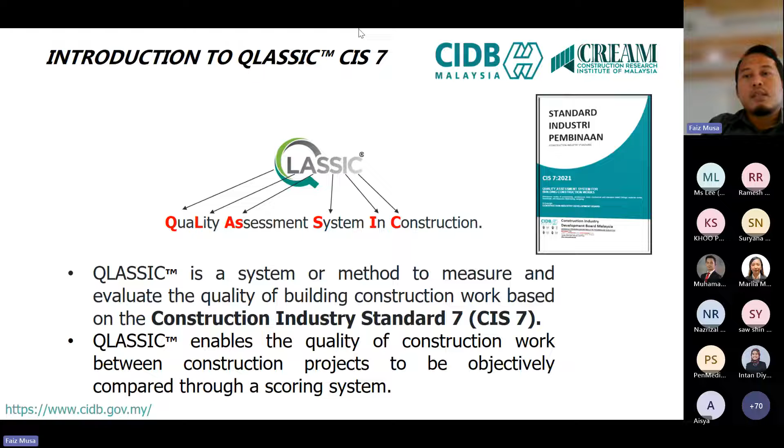So basically, QLASSIC enables the quality of construction works between construction projects to be objectively compared through a scoring system. So for your information, QLASSIC is already registered. We have trademarked it, whereby only CIDB can use the logo, and there's a TM trademark. Okay, so we have registered with IP. Only CIDB is allowed to use the term QLASSIC and its logo.

Okay, so what are the objectives of QLASSIC? There are four main objectives. First is to benchmark the level of quality in the construction sector, whereby if we use QLASSIC referring to CIS 7 to assess a project, for example project A and project B, the scoring can be used as a benchmark. For example, project A got 80 and project B got 75. So that's how we use QLASSIC to benchmark the level of quality. And then second, to identify the contractor's performance.

Basically, the client will use it when, for example, they have one project and divide it into two phases. So maybe the first phase is contractor A and the second phase is contractor B. So they can use QLASSIC to identify the quality of each contractor's performance, carrying out the QLASSIC assessment divided in two. And then third, to ensure that construction industry players are always consistent in providing quality work. So nowadays the big guns, developers like Sunway and Sunrise, are competing against each other for the highest score.

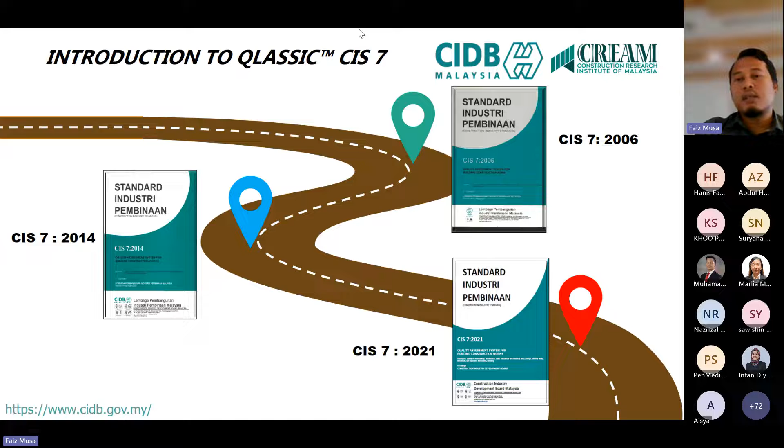So who is involved in the development of CIS 7? Basically, CIS 7 is not developed only by CIDB. We invite industry players to give some input. For example, we invite JKR, JPN, Jabatan Perumahan Negara, KPKT, REHDA, Master Builders, HBA, CABE, PAM, ACEM, and we also have CREAM and IIUM, which were involved in the development of CIS 7 for 2021. So it's not a standard solely developed by CIDB. We carry out workshops to get input from the industry.

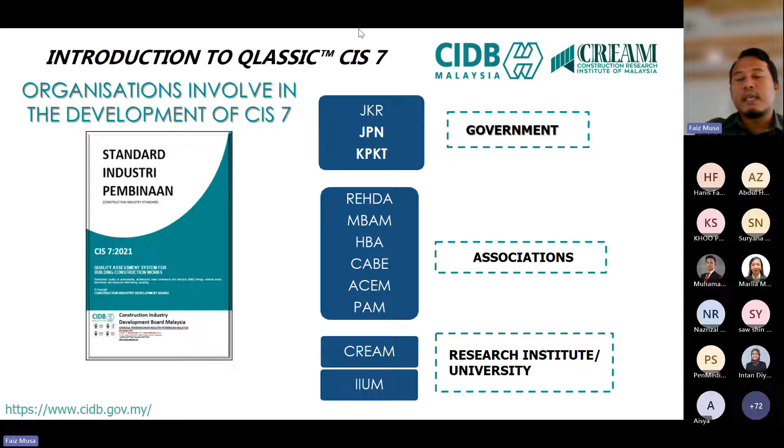So what are the government policies related to QLASSIC? For your information, the 12th Malaysia Plan, RMK 12, has highlighted that QLASSIC assessment is to be made compulsory in order to deliver affordable housing. In RMK 12, the government is supposed to deliver 500,000 affordable housing units. So QLASSIC will be used as an assessment system to ensure the quality of this affordable housing. That's RMK 12.

Next is the Dasar Perumahan Negara, DPN 2018 to 2025. QLASSIC certification is also made compulsory for public and private housing projects, but there's no indication of a score set. They just make it compulsory to carry out QLASSIC assessment for public and private housing projects. The next policy, 2018-2028, also highlighted that QLASSIC certification is to be carried out for all affordable housing projects.

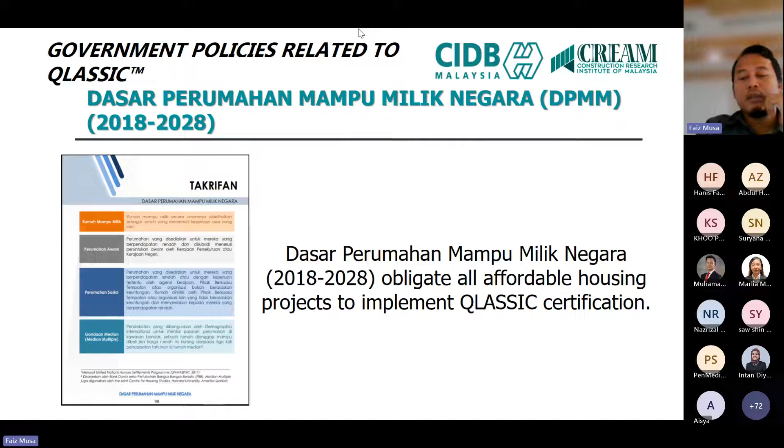Lastly is the National Construction Policy 2030, NCP. Inside there are thrusts. QLASSIC is highlighted in thrust 1, which is strengthening quality and safety in construction projects, whereby at A1.4 QLASSIC is to be recognized as an assessment system to be used for quality assessment. So those are the current policies related to QLASSIC, to increase its adoption.

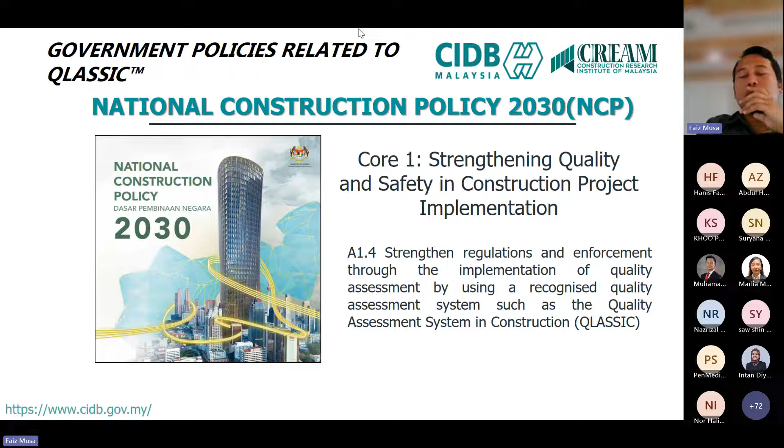These are the average QLASSIC assessment scores from 2016 until 2022. Basically, the private sector's score is higher compared to the government sector. Usually in practice, the private sector will indicate the score inside the contract, for example, a score of 75 that the contractor needs to achieve. That's why for the private sector, the score is slightly higher compared to the government sector.

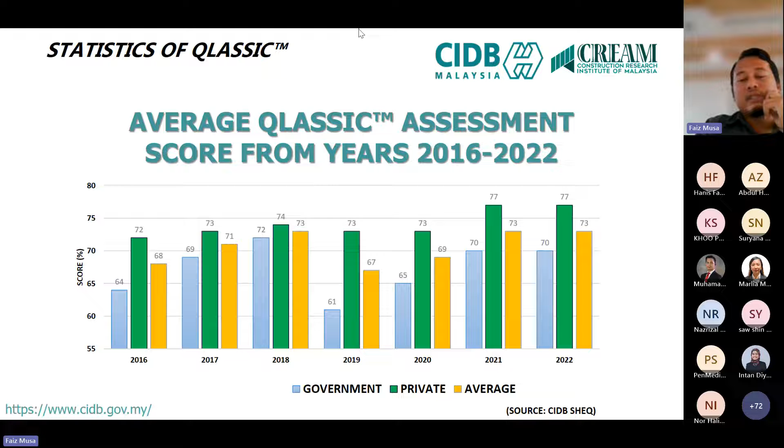So the average for government projects in 2016 is around 64, then 69, 72, and then in 2019 it went down to 61, then increased back to 65, 70. The private sector is roughly around 70 and above since 2016. So the average score for private and government is still above 68, but weighted more to the private side, higher compared to the government.

These are the highest QLASSIC scores by state and number of assessments for the year 2022. As you can see, most states carry out QLASSIC assessment, but the numbers differ. The most projects assessed for QLASSIC is in Selangor, roughly around 70 projects last year, and the lowest is in Kelantan, which is only one.

For the highest score last year, they have been recognized at our event, where we award or recognize the high achievers for QLASSIC. For 2022, the highest QLASSIC score is in Johor, Sangwi or Kalasari if I'm not mistaken, with a score of roughly 90.

These are the scores by state. As you can see, the scores are almost all 65 and above.

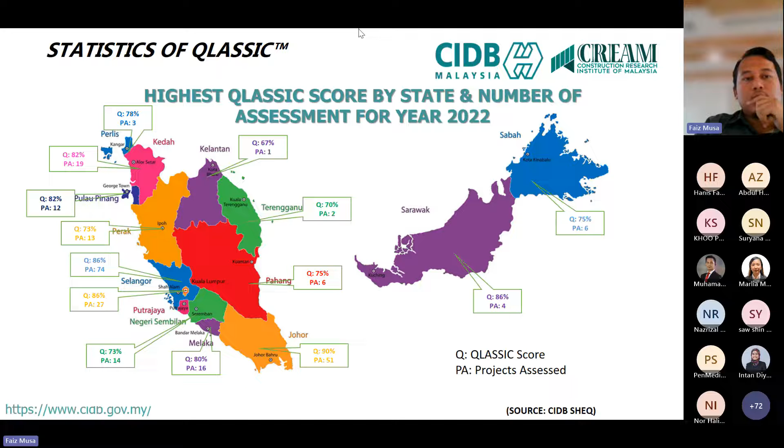This is the average QLASSIC score by building category for the year 2022. For QLASSIC we have categories, but I will not explain in detail because the next presenter will be explaining about it. So we have category A, which is landed, B high rise, C public building without centralized aircon, and D is public building with centralized aircon.

So for last year, 248 projects have been assessed. Category A, mostly landed projects, had the highest number of projects assessed, for landed residential. For example, terrace housing, bungalow, semi-D, double-story terrace house, single-story terrace house. Those are the projects being assessed for category A. The highest score for category A is 90, which is in Johor. The lowest is 58, and the average for category A is 77.06.

For category B, which is high rise, 59 projects have been assessed, which include apartments and condos. The highest score is around 88, the lowest score is 55, and the average score is roughly around 76. For category C, public building without air condition, total assessments carried out is around 42. The highest score is 83, lowest is 65, and the average is around

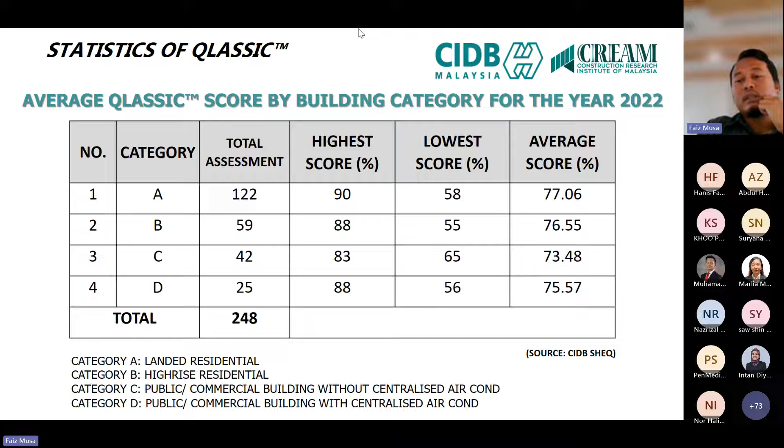These are the adoption among our industry players. For example, the clients that adopt QLASSIC in their projects are Sime Darby Properties, IJM Land, Sunway, Sunrise, Skyworld. Those are the private ones, a few that I listed. For the government, it's basically JKR, PKNS, and Prima.

This is how Prima implements QLASSIC. QLASSIC is not only carried out during the architectural works; it should start during the structure works. The implementation covers the overall process of the project. For example, if inside the contract you did not indicate the requirement to fulfill CIS7 as the standard and QLASSIC, and then in the middle of the progress the client would like to include QLASSIC, first it will increase the cost a bit, and then the process will be slightly changed.

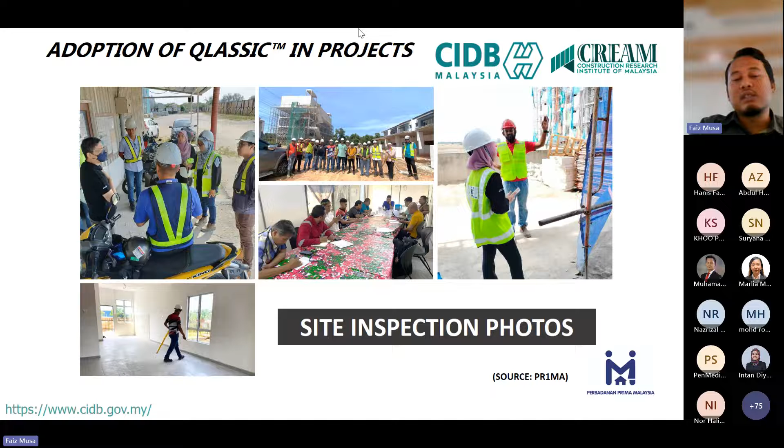For Prima, it started off during the briefing stage, where they indicate the score this project needs to achieve, and then throughout the phases the Prima team will come and work together with the contractor to achieve a higher score. They start during the structure works. As you can see from the picture, during the structure works they ensure everything is in line. For example, if your column alignment is not aligned, surely it will affect your architectural works, your brick works or your plastering works.

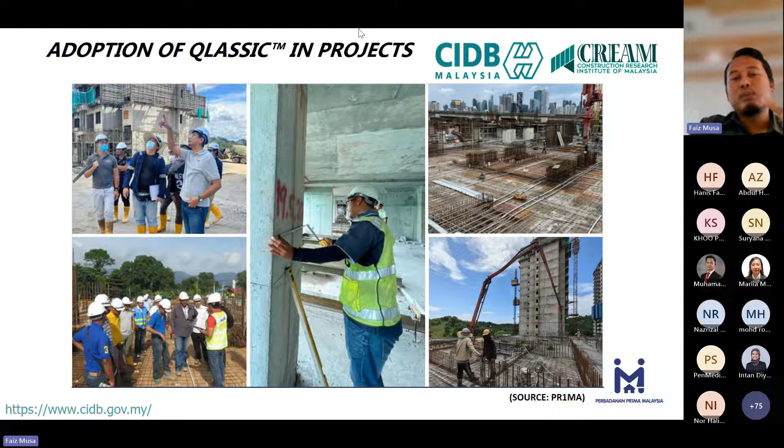That's why during the structure works, the Prima team has their own programs. They carry out the QLASSIC process during the structure process. As you can see, they monitor during the structure phase. And once the structure has been completed, they also start to monitor during the architectural works. As you can see, checking hollowness, everything.

That's how they ensure there's no damage to the material, because basically material cost nowadays is quite pricey, high. So that's why they try to ensure the quality of the materials is in good condition before installation. Okay.

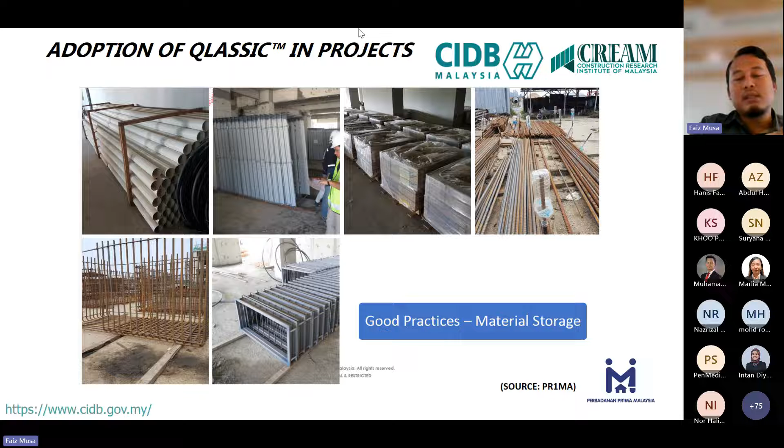Next, I will go to QLASSIC awareness, QLASSIC training. So far in CIDB, we have 2 related QLASSIC trainings. First is the QLASSIC awareness course, which is carried out physically or online. The duration is basically 1 day. The aim of the course is to enable participants to acquire the knowledge on CIS7.

It's open to the government sector or the private sector, and you can go to training at CIDB Holding, or you can just Google CIDB Holding. You can register the class in their system, just register online, then you can go to the course. Okay, so first is QLASSIC awareness.

For those who are interested to become a CIDB QLASSIC assessor, first they need to go to the QLASSIC assessor course, which is physical only. It's a 3-day course comprised of 3 modules. First module is theory, second module is practical, 1 day, and then module 3 is examination.

Previously, we made QLASSIC awareness compulsory. If you were to become a QLASSIC assessor, you needed to attend the QLASSIC awareness course first. But we changed the process a bit. You just need to attend the QLASSIC assessor course and make sure that you pass. Module 3 is basically an examination, there's only fail or pass. Those who pass can go to the next stage. I will explain later.

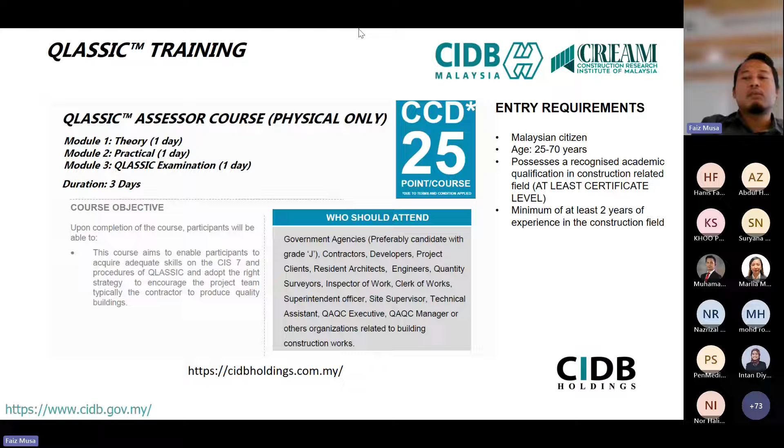So what are the entry requirements? Basically, Malaysian citizen, age 25 to 70 years. Possess a recognized academic qualification in a construction related field, at least certificate level, meaning like sijil pembinaan, not a certificate of attendance. The level of the cert is certificate level at least. And lastly, a minimum of 2 years experience in the construction field.

Then I will be explaining how. If you are interested to become a QLASSIC assessor, this is the flow. Basically you need to apply first for the QLASSIC assessor course by CIDB Holding. Only the QLASSIC awareness and assessor trainings are carried out by CIDB Holding, but they have trainers under them. So make sure the training is by CIDB Holding.

So first you need to apply for the course through CIDB Holding, and make sure your application is complete. If complete, you can go to the next stage. If it's tidak lengkap, you need to go back. Once your application is complete and you make payment, you can attend the QLASSIC assessor course, CIS7.

Next, module 1 is basically theory, 1 day. The trainer will explain how to identify compliance or non-compliance based on CIS7. Then the second day is practical, meaning they will provide a show house where, for example at a wall surface, you need to identify any non-compliance to CIS7. So that one is the practical, day 2.

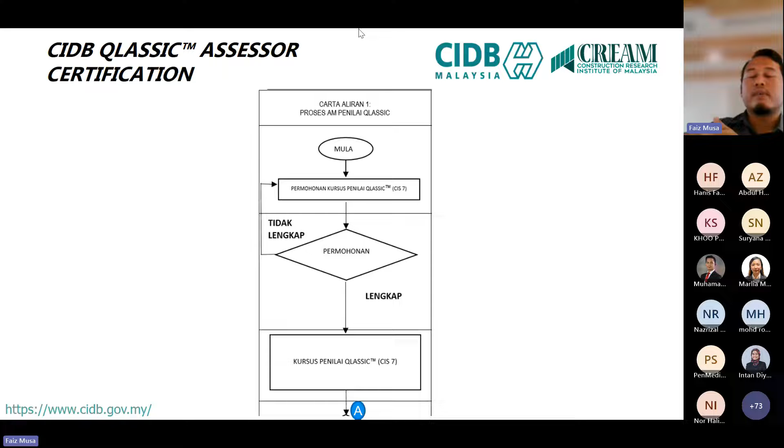If you fail, you can just go back. Just pay again. It's either you go back attending the same course, or you just repeat the examination only. That's the option. But if you feel that you need to go again, you need to pay the full cost. But if you feel confident just to go for the examination, just pay the examination fee, and then make sure you pass.

Once you pass, you can go for the permohonan penilaian QLASSIC to CIDB. You need to fill in a form and submit your proof of passing the examination, the letter from CIDB Holding, and the slip of attendance for day 1 and day 2, module 1 and module 2. Once you have completed your submission, CIDB will process. If everything complies, we will submit your application to our certification center. We call it PP, which is now CREAM.

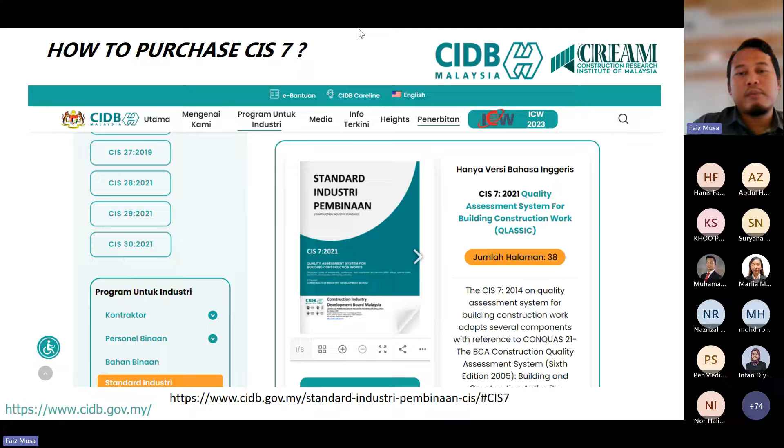The way forward for QLASSIC: we at CIDB are currently trying to make QLASSIC compulsory for government and private building projects. We are approaching KKR and KPKT to make QLASSIC compulsory. But the mechanism has not yet been finalized, so insyaAllah in the future.

And then the second way forward is the enhancement of the QLASSIC CIS7 assessment method, whereby we'll adopt new technology inside our assessment, not only QLASSIC tools. We have, for example, laser devices and drones to assist the assessor to carry out the QLASSIC assessment.

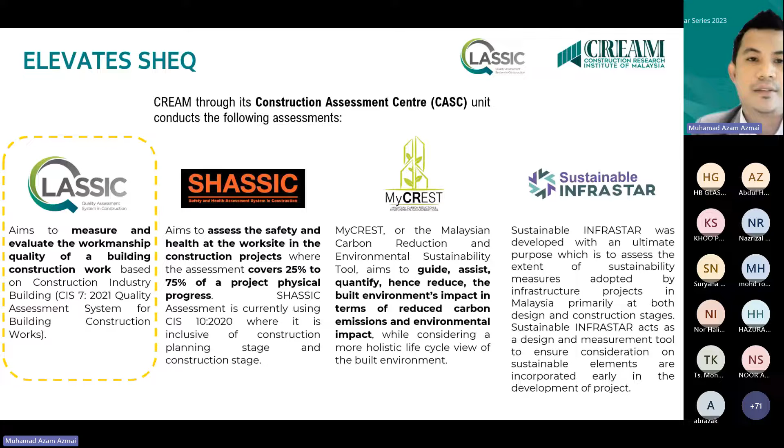For the introduction of QLASSIC, I will not say more because it's already covered by our previous presenter. What I can highlight here is that QLASSIC mainly focuses on measuring and evaluating the workmanship quality of building construction. This is the main element and purpose of CIS7. QLASSIC enables the quality of workmanship in a project to be objectively measured through a scoring system, as a percentage. If a project scores higher, for example 90%, that 90% covers all the main areas in CIS7.

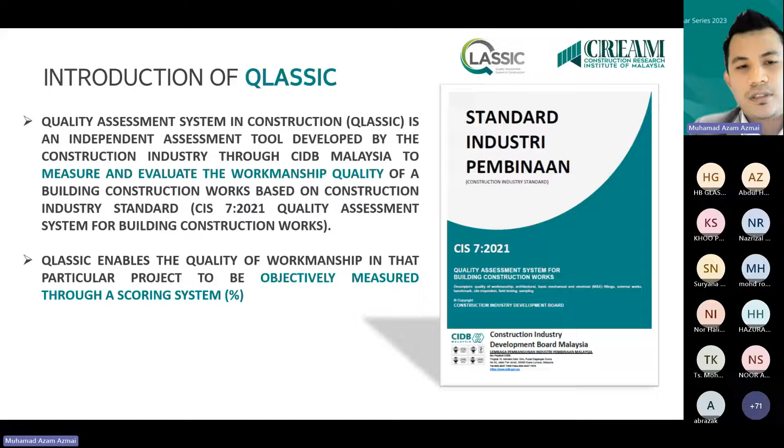So okay. Next is QLASSIC building category. In QLASSIC, we separate into 2 categories, residential and non-residential. Residential is separated into 2 categories, category A and category B. Category A is for landed housing; examples of the housing are detached, semi-detached, terrace and cluster house. Category B is stratified housing. Examples of the project are flat, apartment, condominium, service apartment, SOHO, and townhouse.

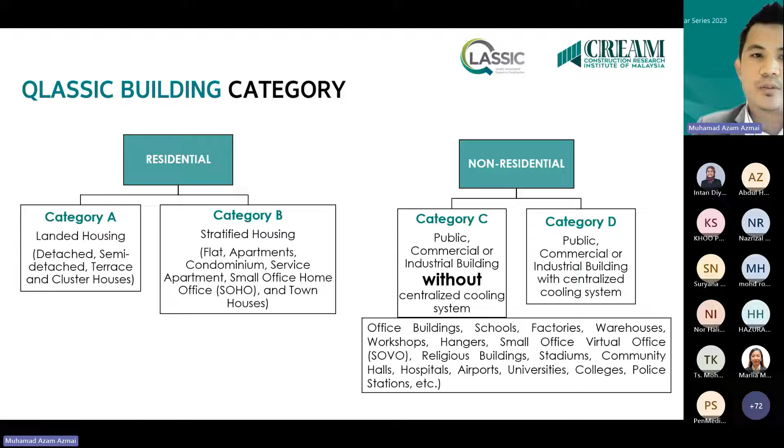Okay, nowadays there are projects that have mixed development in particular buildings. For example, nowadays high-rise building projects have a mall in the project. So it's categorized as a mixed development project. The respective project and development should be categorized according to the building category. For example, the applicant comes to us and says they only want to do QLASSIC on the residential buildings. So even though the mixed development project covers residential and non-residential, the application will only focus on the residential project based on the client's request.

Here, I will go to QLASSIC weightage. This is the weightage that has been set up by the standard. As you can see in table 1, this is the allocation of weightage for components of building construction work according to building category. The three main components in QLASSIC are architectural works, basic M&E fittings, and external works. This is the weightage that has been categorized in the CIS 7.

Okay. For category A and B, the weightage of architectural works is higher than non-residential because most of the assessment in architectural works will cover the units of the project itself. As you can see, residential buildings are where the person will live. So the architectural work is basically the unit, the house itself. So the assessment will focus more on the quality of the architectural works. Basic M&E fittings are very basic fittings like switches and so on. For external works, the weightage is lower than non-residential.

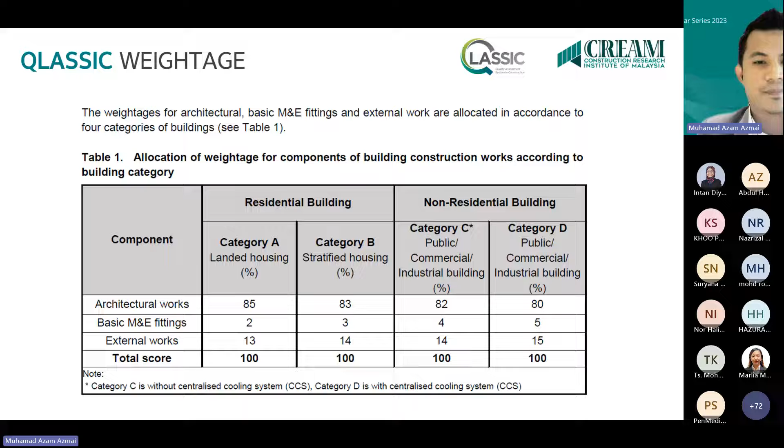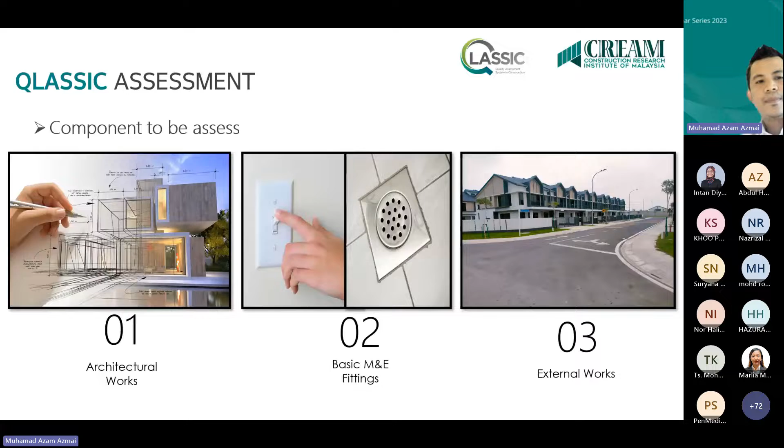Okay. So these are the components to be assessed in QLASSIC, as I mentioned before: architectural works, basic M&E, and also external works. So what is architectural works? Architectural works deal mainly with finishes. This is where the quality and standard of workmanship are most visible. These are the elements in architectural works: roof, window, door, internal fixtures, ceiling, perimeter drain and apron, internal wall, floor, and lastly external wall and fixtures. The elements, defects and checking parts will be covered by our next presenter. Architectural works are where the assessor will mostly do the assessment in a particular project. I will not go into detail on this.

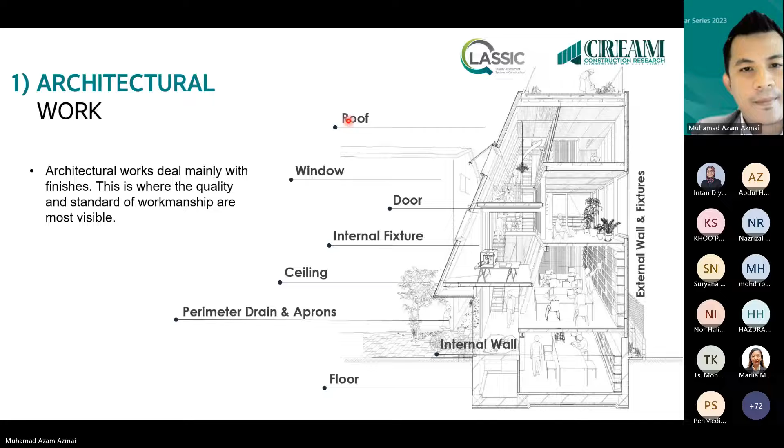This is the QLASSIC weightage for architectural elements. These are the elements that will mostly be covered in the assessment. We have separated them into 3 categories: internal finishes, external finishes, and material and functional tests. This is the breakdown and weightage. For internal finishes, we cover floor, wall, ceiling, door, window, and internal fixtures. These breakdowns are already mentioned in the CIS 7. For external finishes, we cover roof, external wall, apron and perimeter drain, car park and car porch. And lastly, material and functional tests: we cover skim coat or pre-packed plaster and wet area water tightness.

Okay, for material and functional tests, the assessor doesn't have to do the assessment on site. Why is that? Because these two inspections need to be done by the client, and they need to prove it to us by sending over the architect letter that mentions this project has covered both inspections. They just need to declare it in the architect form and submit it to us, to CREAM. If we receive the evidence, we will automatically give the score. This is 6% out of 100% for architectural elements. Okay.

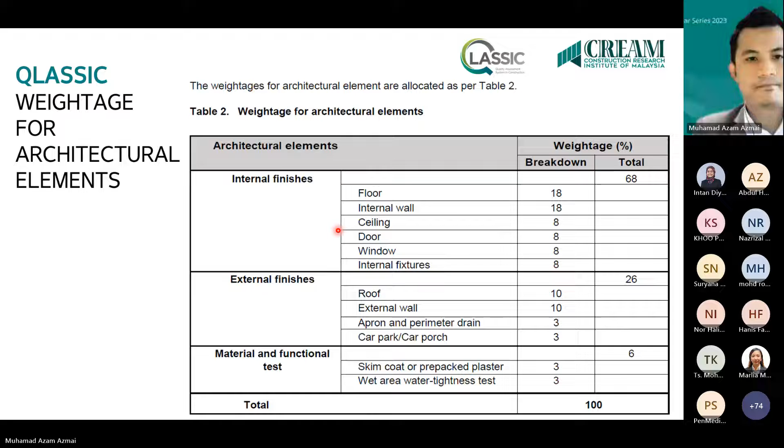This is the QLASSIC sampling guideline. I saw the questions in the chat box, so hopefully I can answer your question. In QLASSIC, we do the sampling based on the GFA of the project. It's not practical to do the assessment in every unit or house in a particular project.

For example, nowadays in high-rise residential, the number of units is increasing, and most projects right now are focused on high-rise buildings in category B. Based on our records, the number of units is increasing, starting from maybe 2,000 units to 3,000 units.

So it's really impossible for CREAM and the assessors to do the assessment in all of the units. It would take a month or 2 months to finish the project. So QLASSIC realized the issue, and they introduced the sampling guideline here.

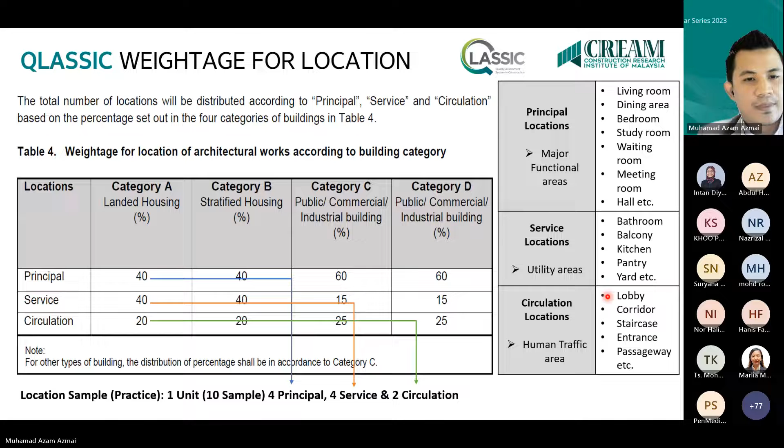Okay. Number 2, I will cover basic M&E fittings, mechanical and electrical. The quality of M&E works is important in view of its increasingly high cost proportion and its impact on the maintenance of a building. The assessment only covers basic fittings, covering plumbing and M&E fittings. For plumbing, the assessor will assess the quality of the finished work.

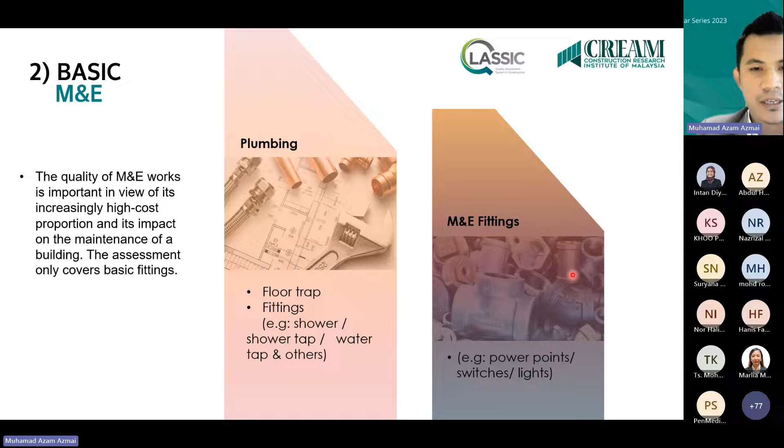For floor trap, for fittings we cover shower tap, water, and other elements that have been installed in the location. For M&E fittings, we cover power points, switches and lights. We will cover only the finishing part for these elements. The weightage for basic M&E fittings is here. For categories A, B, C, and D, the percentage and the weightage are different. Okay.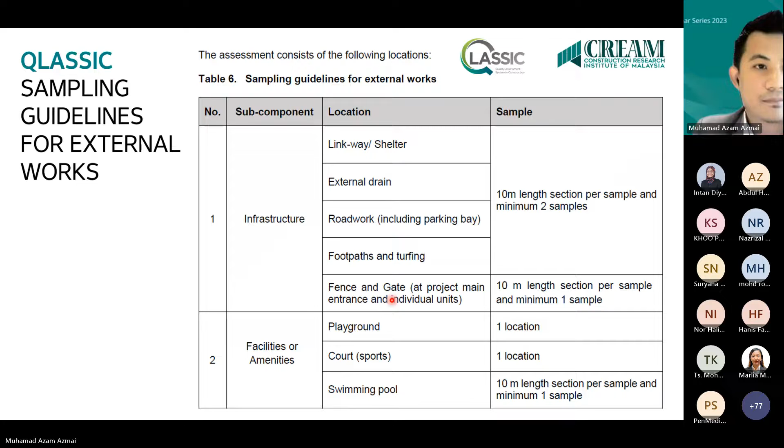So what is the evidence? In our process, the main document evidence that we need from the client is the surat vacant possession, or vacant possession letter. So what is the importance of this letter? Because we want to know when the project will be handed over to the client. We don't want to do the assessment past the date of the VP, because we don't want to do the assessment when the client is already inside the building. Maybe the quality will be affected.

And next is the surat perakuan arkitek. Okay, here the surat perakuan arkitek, or we call it a declaration letter.

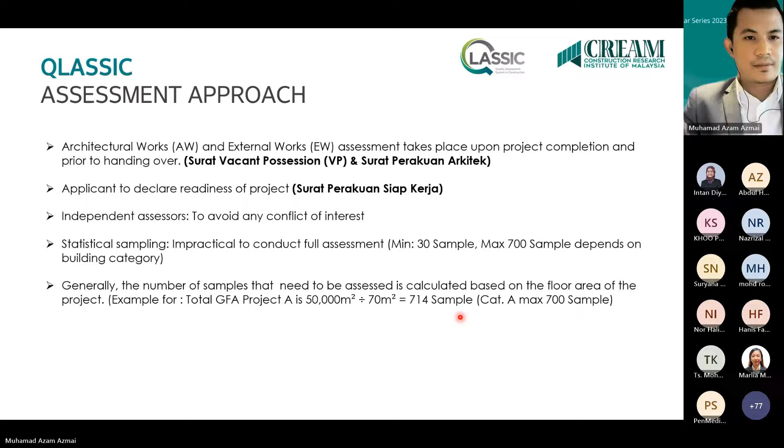Number 2 is sampling. The number of samples to be assessed is based on the total GFA and the sampling guideline in CIS 7. Number 3 is notification of assessment: after the sampling, we notify the assessor. The assessor is an independent and certified CIDB assessor who carries out the assessment.

Number 4 is site project assessment. When the assessors are notified, they come to the project and do the assessment at the project site. Normally in a QLASSIC assessment, the duration is from 1 to 4 days. And lastly, when the project has been assessed, CREAM will issue the assessment report and certification.

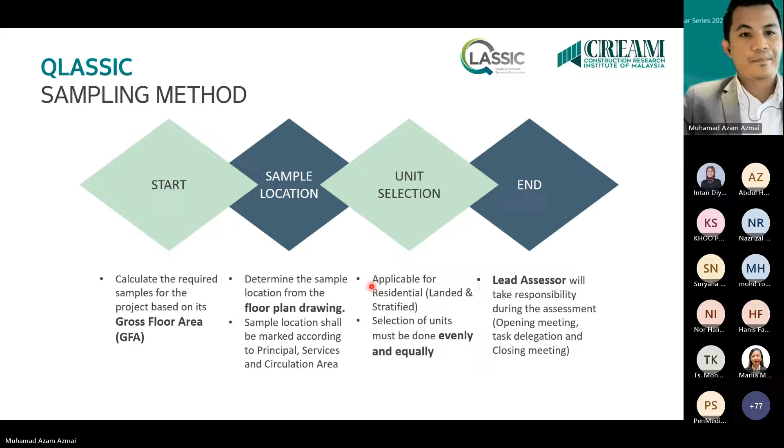Okay, as I mentioned before, the client needs to look at the surat architect. They already declare some elements that need to be excluded, or some of the design that does not meet the criteria in the CIS 7. So we need to discuss first before the assessor does the assessment. Lastly is to inform sample and unit selection and to ensure all samples or units selected are available for the assessment. This is very important.

That's why it is very important the assessor comes before the VP takes place. We want to avoid the units that we have selected not being assessable due to the arrival of the home buyer. Okay.

Next is assign job. Lead assessor to divide and distribute samples and units equally to members. For QLASSIC, the total number of team members depends on the number of samples and days of assessment. Normally in our practice, for assessment of 1 or 2 days, we will cover with 2 assessors. For the maximum sample for category A and B, it will be divided into 2 teams, so the total number of assessors required is four.

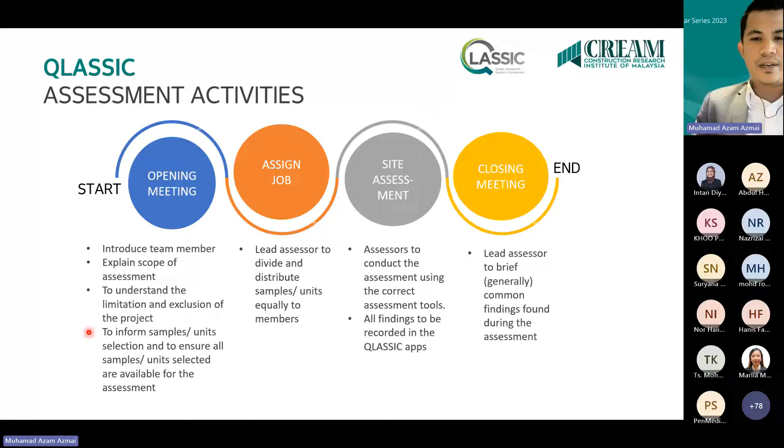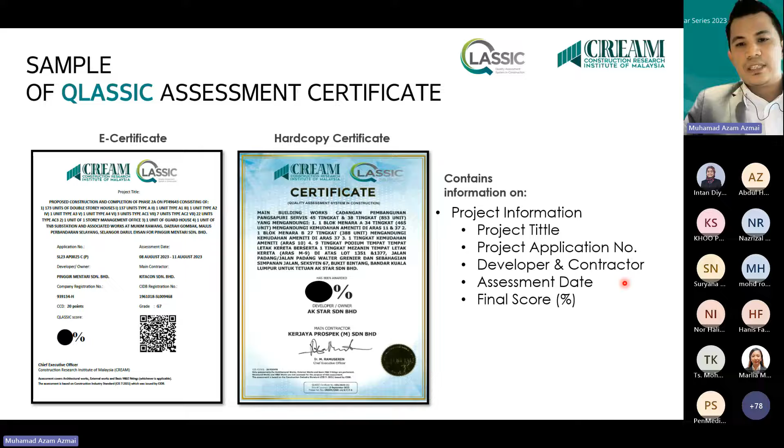So that's all for my presentation. So, as a QLASSIC slogan, here is doing things right the first time and every time. So good luck to every one of you and enjoy the webinar series.

Can share. Yes, yes, we can see your slide. Ada keluar? Can you stop sharing first? Now you're sharing your screen. Okay, can you share your PowerPoint? Okay, yes. Share window. Okay.

Assalamualaikum, good morning and salam sejahtera. My name is Muhammad Helmyyuzi. On CREAM Webinar Series 2023, I will present my part: assessor guidance, best practice tips and common assessment findings. Okay, we go through the first slide.

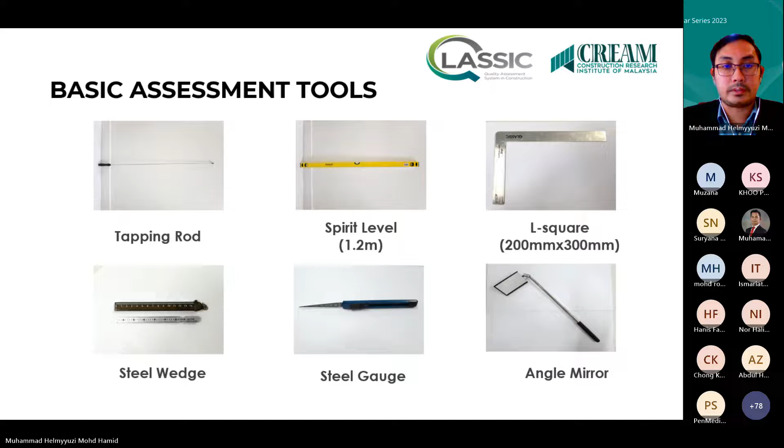This is our basic assessment tools that we use when doing a QLASSIC assessment on site. The first one is the tapping rod. Second one, spirit level 1.2 meter. The third one, L square, 200 millimeter times 300 millimeter. Then steel wedge and steel gauge, angle mirror. So these 6 items are the basic tools that we use during a QLASSIC assessment activity. Okay, we go through one by one.

First, the tapping rod, that we use for checking hollowness on floor and wall. Usually we use it on the floor surface, and also skirting, only tile skirting. For the method, swipe the floor and wall surface. When we swipe, firstly you hold the tapping rod, and then if you hear a sound different from other tiles, maybe not a solid sound, you can stop and tap to make sure whether it is a hollow sound or not. It's the same with the wall surface.

For tile skirting, you can use the tapping rod, swipe or tapping. Usually we tap; tapping is more convenient for tile skirting. Also, the tapping rod is not suitable for timber flooring and timber skirting. The other use of the tapping rod is to detect any lippage on tiles. Usually you swipe every floor, and if you feel your ball bearing bounce from the floor, then you can use a steel wedge and L square to confirm whether there is any lippage between two tiles on that floor.

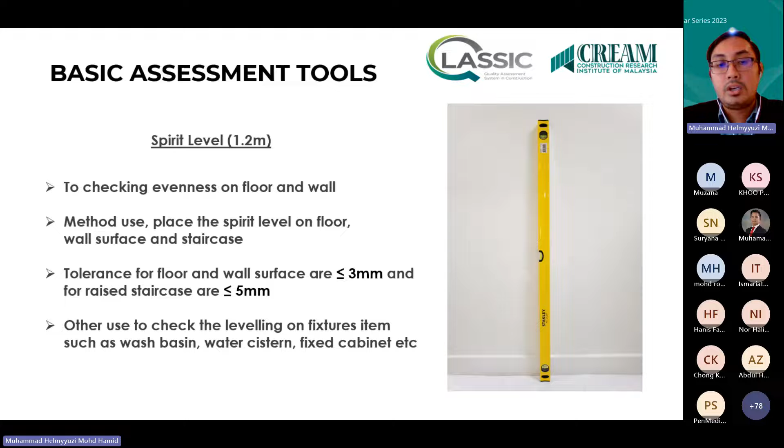Okay, the next one is L square. We use L square 200 mm times 300 mm. Usually this one is for checking the wall is made at right angle, usually at the corner, inner and outside. Method used: place the L square on wall corner, and lippage between two tiles. Okay, the method for lippage between two tiles, I will show you on the next slide. Okay.

Okay, for L square, if you see any gap or a non-consistent wall area, I mean wall corner, you can put the L square on the wall corner and use the steel wedge to measure the angle, to measure the gap for L square. Okay, for the corner, actually I didn't put it on the slide. In this corner it must not be more than 4 mm.

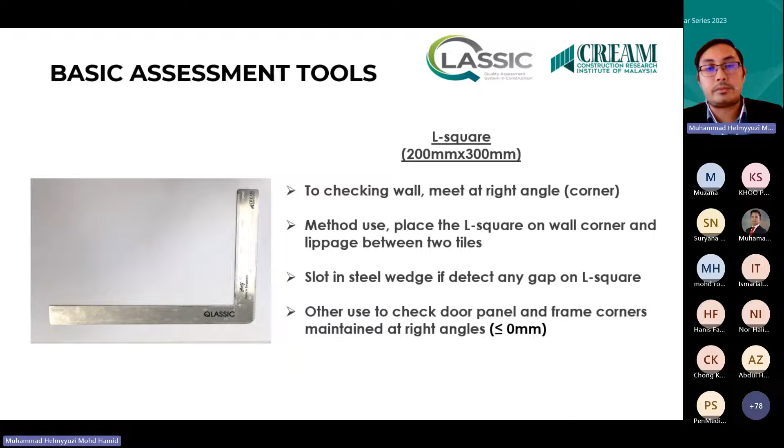Okay, the other use for the L square: you can use it to check the door panel and frame corner to maintain a right angle. You can see this picture. You can see our QLASSIC assessor used the L square to make sure to get the right angle. The tolerance is 0 mm. To make sure the frame or the door frame has no sagging, it must be straight and perfect.

Okay, these three are our small items that we use. First, we go through one by one. Steel wedge. The steel wedge is to measure floor and wall alignment and evenness. As I mentioned just now, the steel wedge is usually paired with the spirit level to check the evenness, usually on the wall surface, to make sure not more than 3 mm. Also it's paired with the L square to check alignment and lippage: alignment at the corner and lippage between two tiles at the floor.

Okay, this is the steel gauge, also called steel rule. Sometimes other assessors call this one steel rule; steel gauge and steel rule are the same. It is used to measure consistent gap on top and bottom of the door panel. We can slot it in and check every gap from top and bottom. Make sure not more than 5 mm tolerance. Also to measure between door panel and frame, we can slot it in top, down, and also right and left, to see door panel and frame not more than 5 mm.

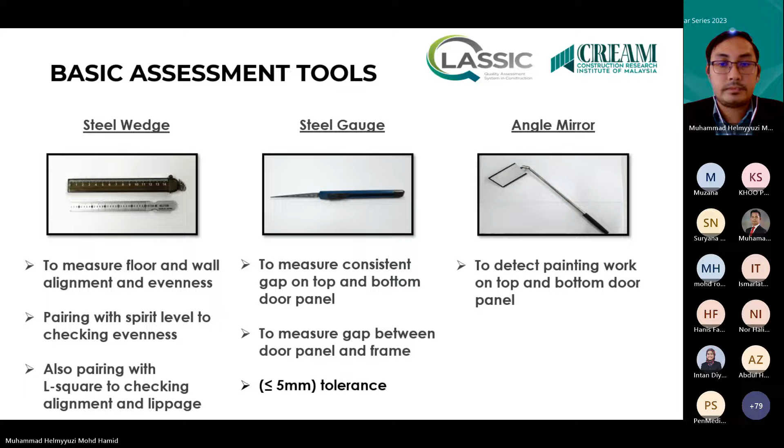Okay, the next slide. This is our QLASSIC assessment form for internal finishes. You can see right here, you just state the project, block, and unit. The assessor usually uses this form when doing a QLASSIC assessment. They must fill up all these blanks: project, block A, block B, anything, and unit number. And the project ID is usually stated in the surat pemakluman. Usually when the assessor gets the job from CREAM, they get a surat pemakluman, and it states the project ID.

Also the date of assessment. Usually we use two assessors, assessor 1 and assessor 2. Okay, these are the items and elements we check: floor, wall, ceiling, door, window, fixtures, and basic fittings. Okay, here I just fill the item and location. You can see it's living. For that I just circle living on P. It's called principal. P for principal, S for services, and C for circulation.

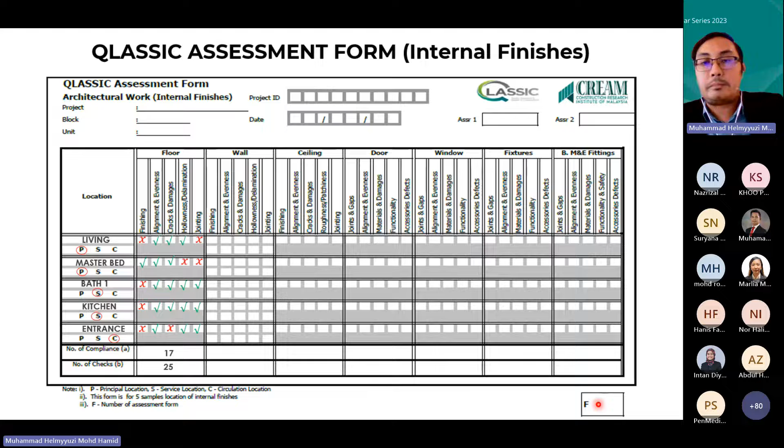If the item is not NA, not applicable, you can calculate all of this. So 17 over 25. Also, the assessor, do not forget to fill the form. We call it F for form. These are form 1. Okay, we go through the next slide.

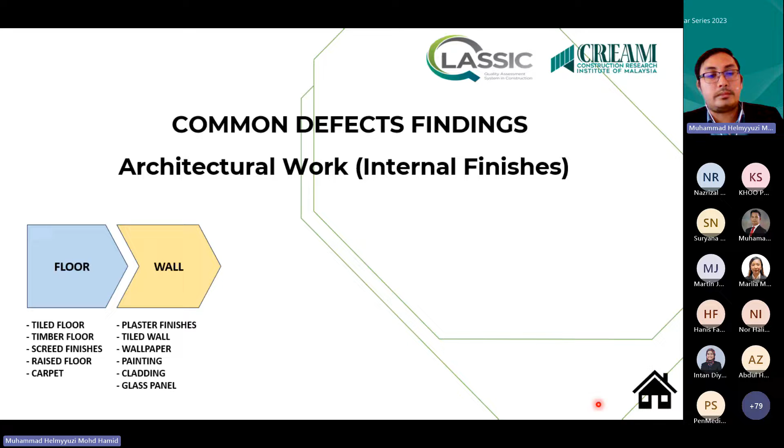Common defect findings for architectural work, internal finishes. Okay, for floor, in the industry now there are so many floors that we can see. I just state here: tile floor, timber floor, screed finishing, cement screed, raised floor, carpet. And also we check wall: plaster finishing, tile wall, wallpaper, painting, cladding wall, glass panel, etc. Also ceiling: plaster ceiling, false ceiling.

And then door: solid panel door, sliding door or pocket door, flush door. Also window: louver, top hung, casement window. And the fixtures: water cistern, wash basin, railing, kitchen cabinet, wardrobe. And the last one, basic fittings: switches, power point, and floor trap. This is 6 plus 1, 7 elements that we check for internal finishes.

Okay, this is a picture of defects for floor. You can see the first picture. Maybe you just saw a paint stain. In the QLASSIC form, the QLASSIC assessor can see maybe 2 defects: tile finishes with paint stain, and also at the jointing you can see paint stain there. The next picture, the second one, is the grouting. You can see there's a gap on the grouting for the tile. And the third is a lippage between 2 tiles.

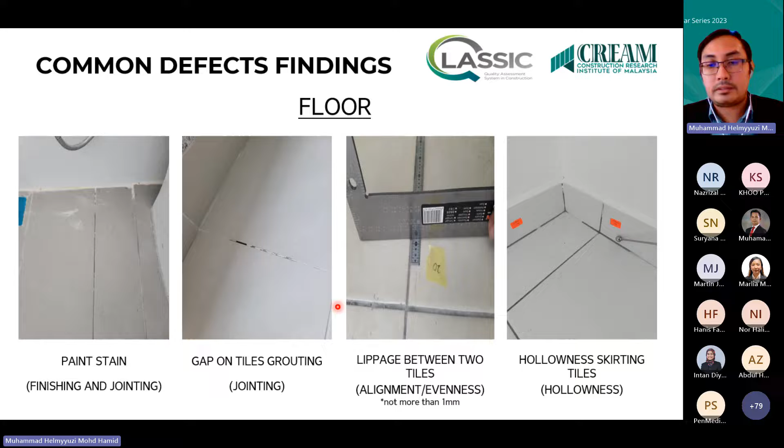And then the second, we can cross at the jointing. And the third, we cross the alignment and evenness, not more than 1 mm. If it's more, we just cross. And hollowness, the last picture is hollowness. Okay, there is another picture for floor, on timber floor. We cross at the finishing, chipped damaged tile. We cross in the form at crack and damages.

And the third, we can see timber flooring, gap and damaged timber flooring. We cross crack and damage. Also, you can see there is a gap on the timber. Also, we cross the jointing. So there are two defects in this one picture.

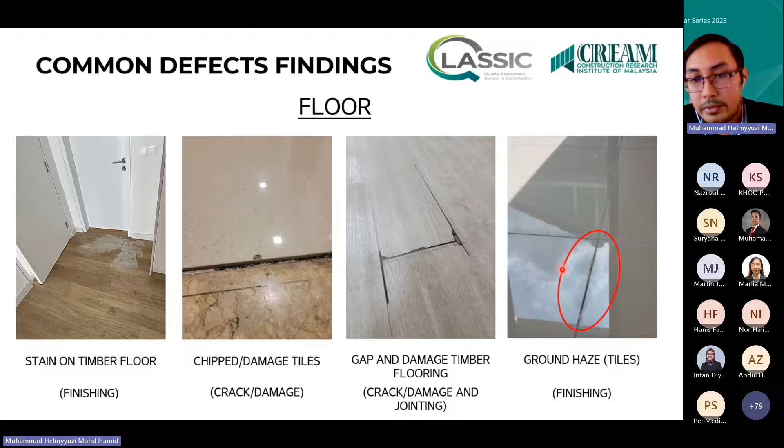Okay, the last one, usually I see it at some sites. I just saw there's a ground haze stain. Ground haze stain usually appears maybe from moisture, I think from the jointing of the cement screed, and then it just spreads into the floor tile, so it becomes like this, becomes a defect. So we cross at the finishing defect.

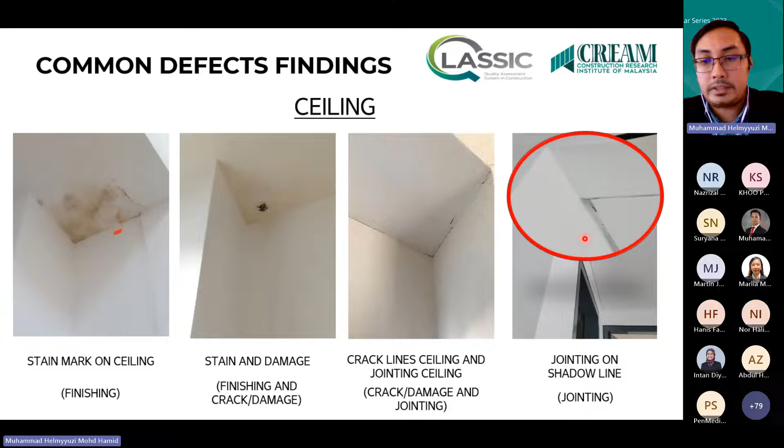Okay, the next slide is for door repair mark finishing. If there is any damage on the door, sometimes there is damage on the panel door and the workers do not repair it with the, what we call, the white filler. They do not repair it back. They just paint back. They just repaint the door panel. As assessors, when we see this, we just cross the finishing because this is not a perfect job. That's not a nice view.

Okay, the next one is no painting work on top of the door panel. Material, we cross at the material and damages. Usually, if there is no other defect on the door panel, you can use the inspection mirror to look at the top of the door panel to see if there is any painting work or not.

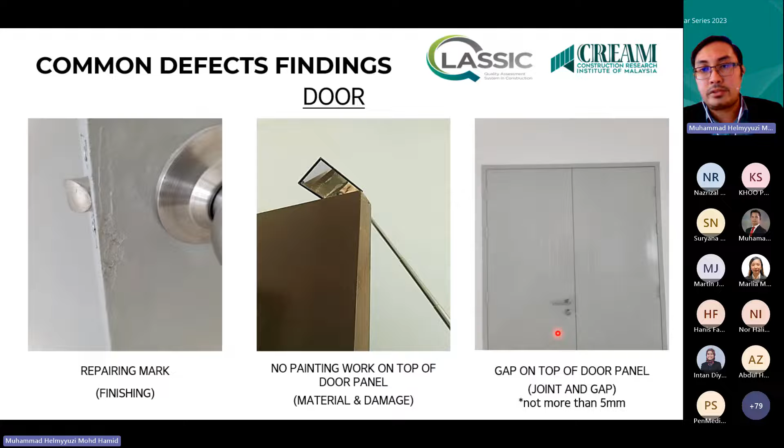Okay, the last one is gap on top of door panel, joint and gap. You can see this picture. When we look from far, we can see there is a perfect gap around the door panel. But if you want to make sure, when you see just a little gap, you must use the steel wedge to measure the gap on the top of the door panel. As you can see, there is more than 5 mm. So there's a defect for joint and gap.

Okay, the next picture, paint stain, paint drop on the accessory, because of the accessories defect. And the next picture, rusty mark on door handle, also an accessories defect. Okay, the last picture, rattling sound when closed. This is because of alignment and evenness. When we close the door, you can hear if there is any rattling sound. This rattling sound is one of the defects.

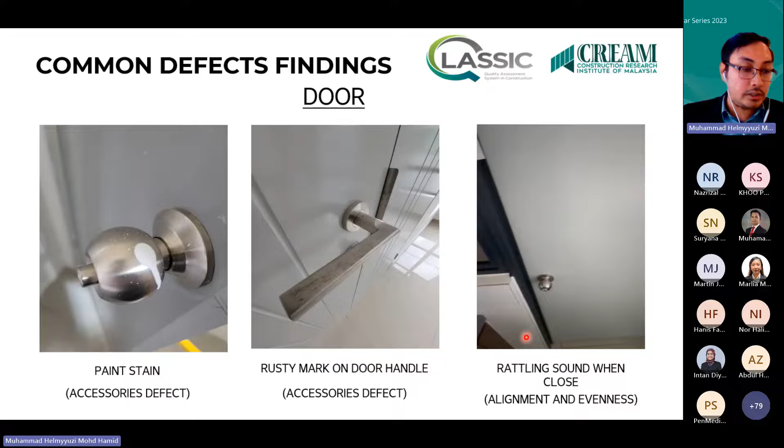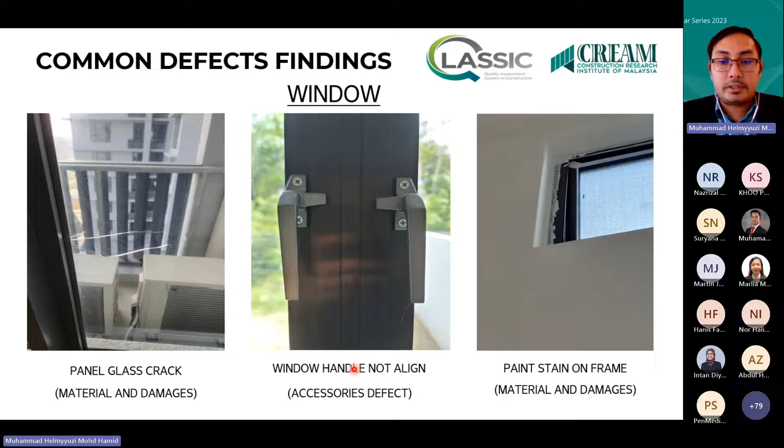Okay, the next one, window. As you can see, panel glass crack because of material and damages. Window handle not aligned, because of accessories defect, you can see these two window handles are not aligned. And a paint stain on frame because of material and damages. And the next, fixtures and fittings: concrete stain, material and damages; broken flush button, we cross accessories defect; and gap between basin and tabletop, joint and gap.

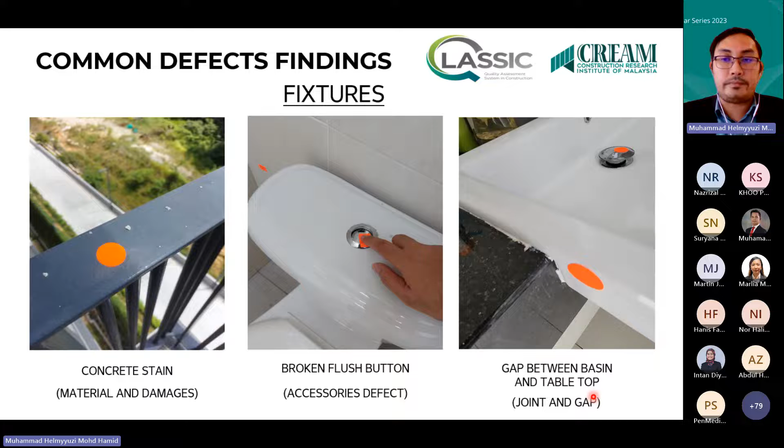Okay, the next pipe, not aligned, we cross at alignment and evenness. Sometimes, like this, the assessor needs to check every wet area has a floor trap. If they find a half moon like this, there is a defect for alignment and evenness. The next one, switches not aligned, alignment and evenness. You can see the switches are not at the same level.

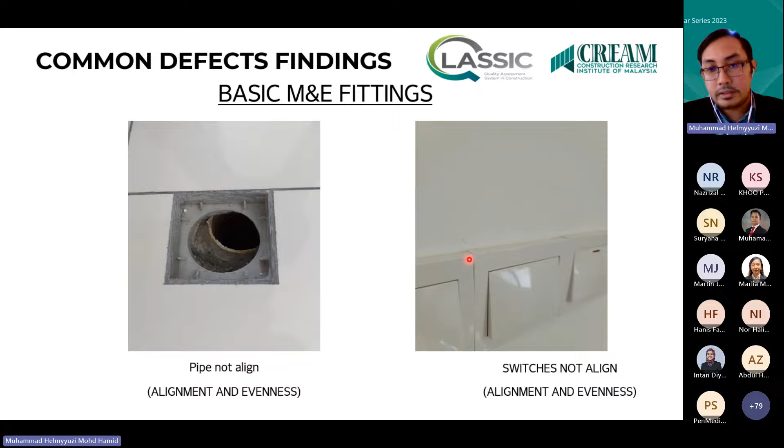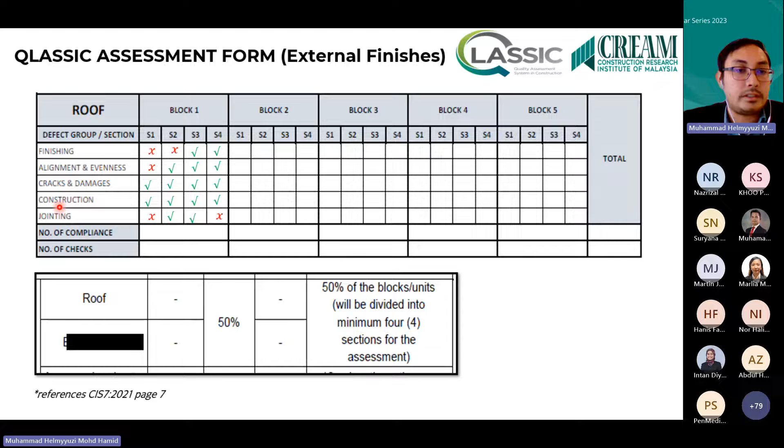Okay, we go through the next form. The next form is for external finishes. For the roof, I just make an example. Finishing for sample one. Right now, I make an example for one block only. One block: finishing, alignment, evenness is the same. We just change to construction. Finishing, alignment and evenness, crack and damages, construction, jointing. And after the assessor has assessed the roof, they must calculate the number of compliances and number of checks. So 15/20.

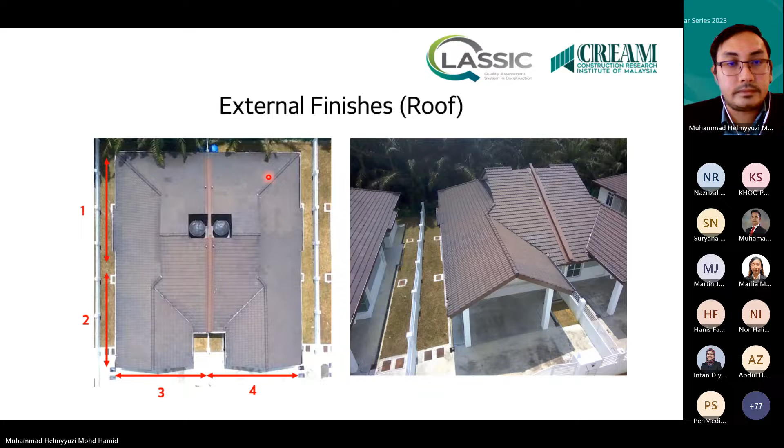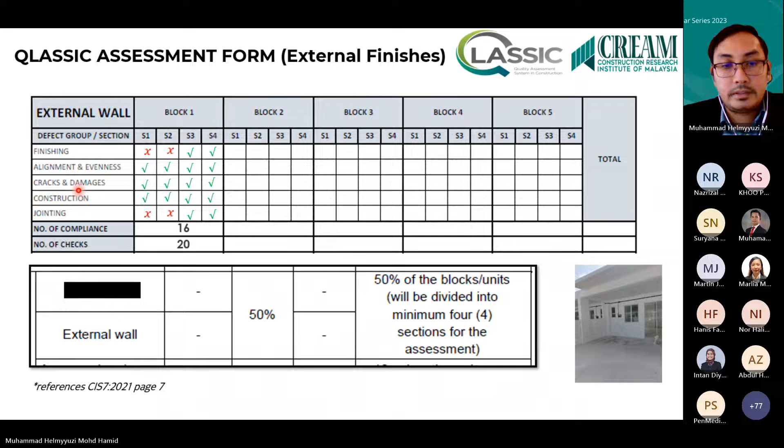Okay, this is for external wall. The assessor can divide like this: sample 1, sample 2, sample 3, and sample 4. This example is for a terrace housing. If one block has 10 units or more than 50 units like this,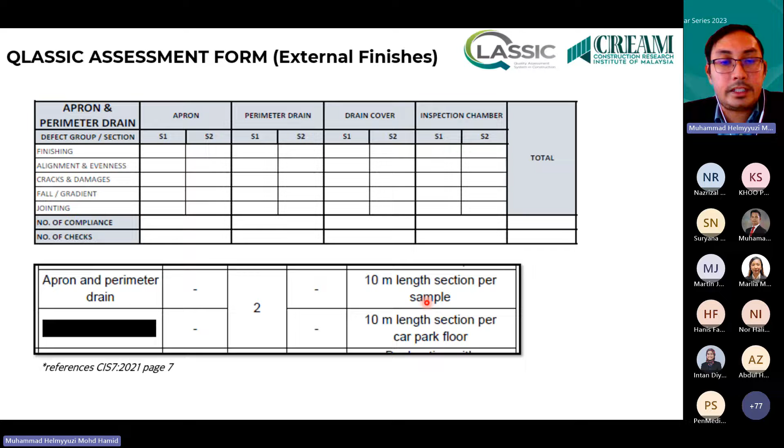You can see 10 meter length section per sample. So 10 meter for one sample, and then another 10 meter, 2 samples. You can take a sample like this one for 10 meter, and the second sample, you can take another house or any area. And you can see the right picture is drain and concealed drain.

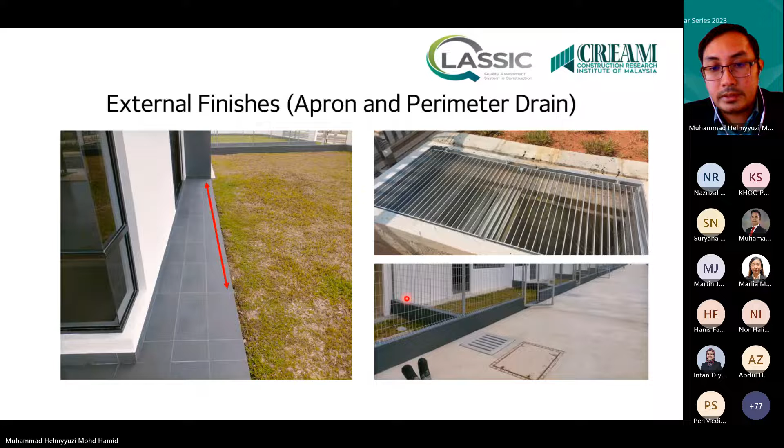Okay, the next is car park and car porch. Usually car park and car porch will cover floor, column, wall, ceiling, features, basic M&E fitting. Also minimum 2 samples, 10 meter length section per sample. Okay, this is an example of car park and car porch. You can take the floor, column or wall, the ceiling, and basic M&E fitting. Maybe the picture is too far. If you can see, there's basic M&E fitting there, switches.

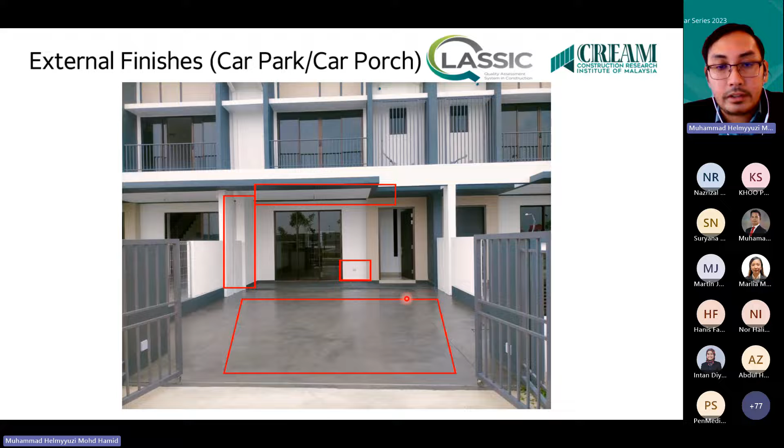There's a power point right there. And in this picture, there are no features. Features may be a wardrobe or anything attached to the building, attached to the wall.

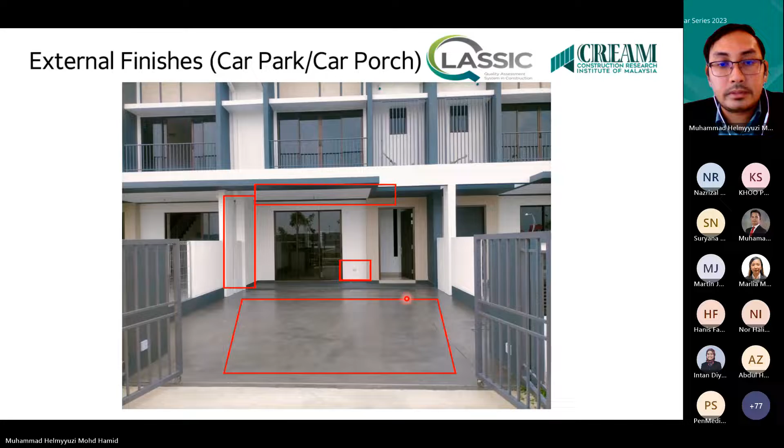Okay, next we check road work. For road work, we check road surface, road marking, road curb, road sign, and road lighting. Also footpath and turfing, lighting features. Also these two items, 10 meter length section per sample and minimum 2 samples. Minimum, you can take more. Reference CIS 7 2021 page 9.

You can take footpath turfing. You see a perfect turfing like this. And the second picture, road work. As you can see, road work has road surface, here road marking, road curb, road lighting, and road sign. So if the assessor takes all the elements like this, it's better.

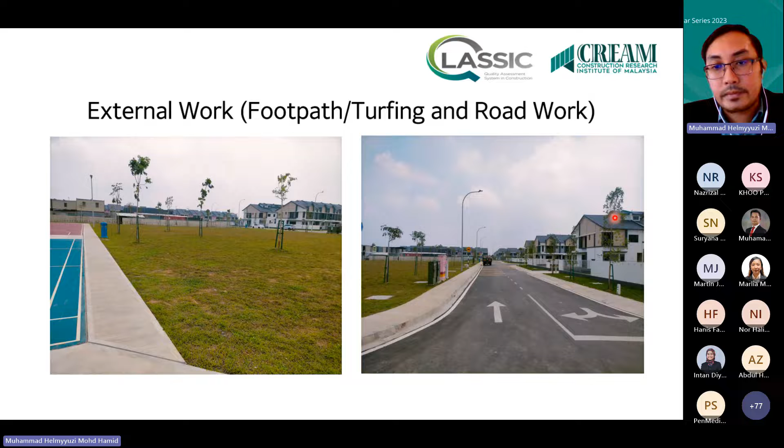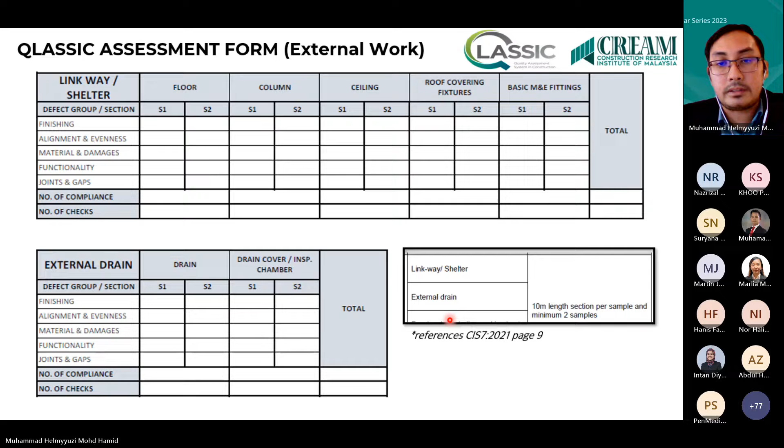Okay, next, linkway shelter. For linkway shelter, floor, column, ceiling, roof covering fixtures, basic M&E fitting, and also external drain, cover, inspection chamber. Also 10 meter length section per sample and minimum 2 samples. You can see we take a sample for shelter and external drain.

For external drain, by the new CIS 7 2021, if there is any water ponding inside the external drain, the water not flowing, the drain does not flow, we consider it a defect in alignment and evenness.

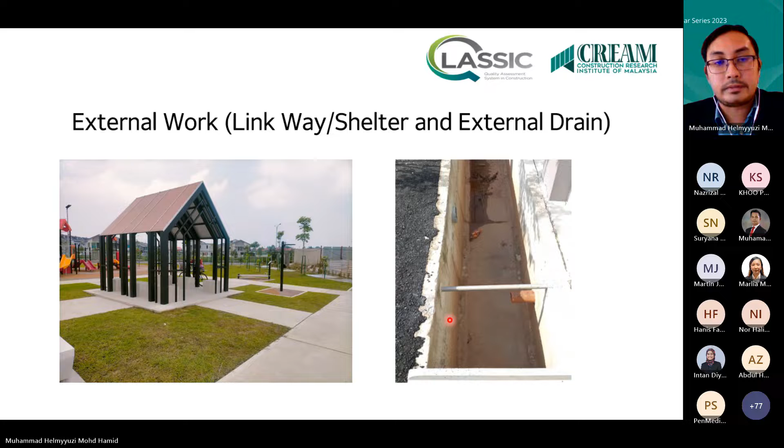And the next item, fencing and gate, we check fence, gate, basic M&E fitting, features. 10 meter length section per sample and minimum 1 sample. Okay, you can take the gate, one or 2 samples. This is a gate, main gate, and also fence here. If there are any features, any fittings, switches like here, you can take them.

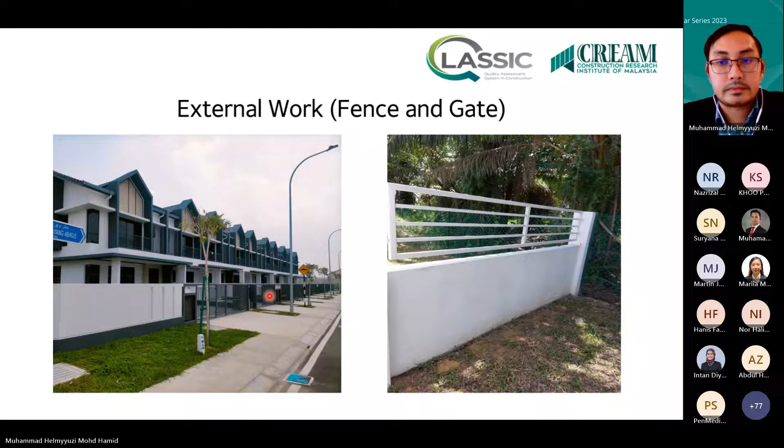Next, we cover the playground floor, playground equipment, lighting, side drain, fixtures. Okay, we cover playground, courts, swimming pool. Usually on-site has one location for playground. If there are 2 playgrounds, the assessor can take 1 or 2 locations, it's okay. For playground and court, 1 location. For swimming pool, 10 meter length section per sample and minimum 1 sample.

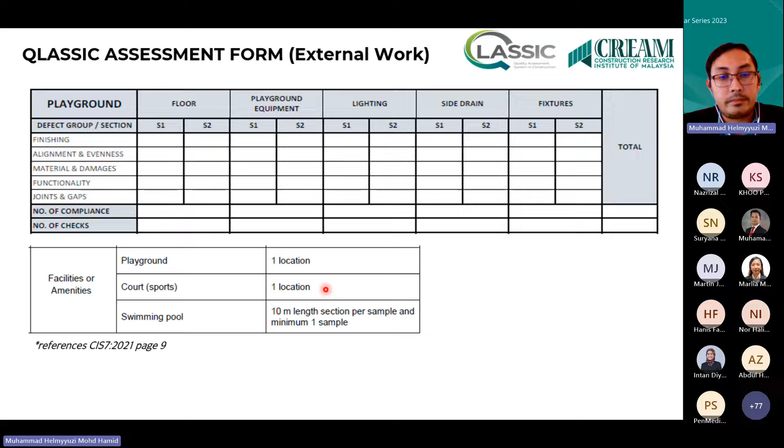Like this court, floor 1 inside court, floor 2 outside court, signage, basic and main fitting, fixtures. Swimming pool, we cover overflow drain, pool deck, ladder and railing, basic and main fitting, fixtures. This example picture is for external work, playground, court and swimming pool. You see the playground, we take here.

For the floor, playground equipment, fixtures, if there is any fixed bench, they apply here. Side drain, in this picture there is no side drain, so we just cross for NA, not applicable. And lighting. So this has 4 items. And the court, inside court here, one sample, outside court, one sample, and the lighting here, you can see.

So the next is swimming pool, railing, pool deck, and basic main fitting and fixtures. I think that there are no fixtures here. Usually in the swimming pool area, I mean inside this pool, we do not check.

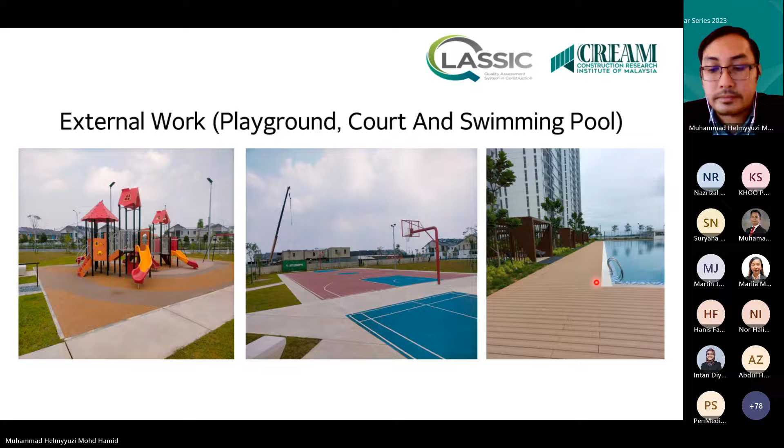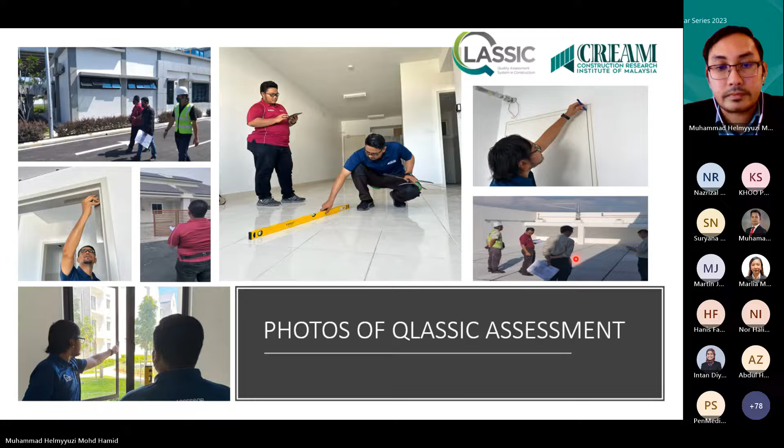Okay, these best practices and tips are just shared from other industry players. This is just basic best practice. The first one is encourage workers to attend QLASSIC awareness training. For the industry player who wants to know more about QLASSIC, how our assessors do the QLASSIC, how they check, how they use the tools, how they count the number of checks and complies on the form, you can attend the QLASSIC awareness training.

Also, you can invite your subcon, COW, or anyone. They must attend the awareness training to know how far QLASSIC can go. The second one is on the site, you must supervise and monitor workers at site. Usually you must monitor the subcon's workmanship, such as painting work and rectification work. For painting work, you can see when they're doing it, they must cover the floor, any area they must cover.